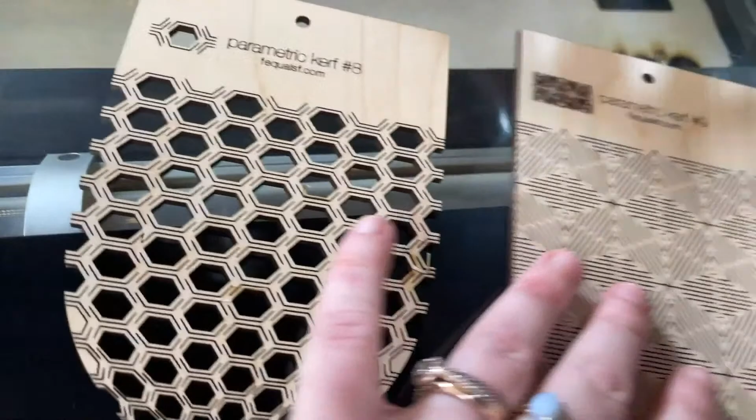Beautiful. If you want to take it a step further, I found some of these swatches online which I think are pretty cool. We didn't create these - I found them going down a rabbit hole on Pinterest. So these are the creators right here? I think so, yeah.

Whether they're the originals, I'm not really sure, but I think it's a cool demonstration of what you can do with this technique. This one's awesome because it gives you a three-dimensional kind of thing, so you can imagine using this on something that had to bend in 3D.

And this pattern's pretty big. If you shrunk this down by half, you'd in theory get about twice the amount of flexibility out of that too. That is so cool. And then this design here is very open, so we've got lots of holes which could show through a fabric or a backer, kind of like what Akika did. And then this one's very decorative but is utilizing closed holes.

Maybe I'm just scared to bend it - this doesn't seem as bendy as the other two. Exactly, and I thought that was interesting about these swatches. You'd think this would be really bendy because of all the open space, but it's more structured. Yet Akika's, which also has a lot of open space, is super flexible. That's all to do with the size of the holes in relation to how they're joined together, essentially.

There'll be some technical terms that I don't know, and I chose not to look them up so I didn't look like a fool on air. But basically, the wider that slot is that you cut, and the more of them that you cut, or the more material that you remove, the more flexible it can be.

What you'll often find with some of these, where you're just using a simple cut, is as they bend, the material essentially bunches together. Like the edges here and here and here, they're starting to touch. And as soon as they touch, they can't flex anymore - all they can do is break, which is why you need a quite dense pattern to get a lot of flexibility out of it. That makes sense.

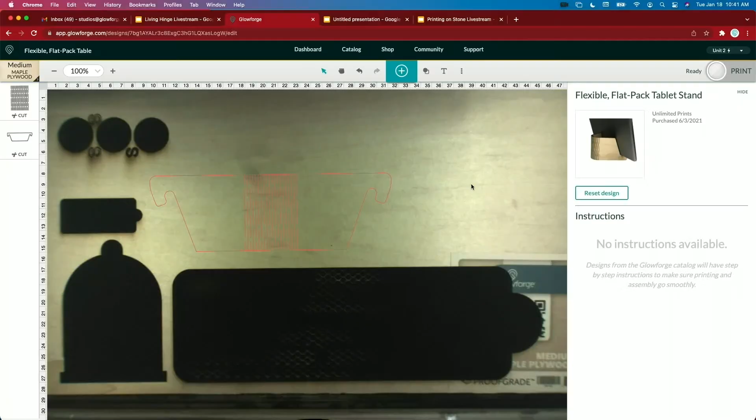Right now I have a Glowforge Pro attached to my computer, and this is the Glowforge Print App. This is all web-based, so it doesn't matter if you're on a Mac or a PC, or even want to use a tablet. If you can access a website, you can access the app.

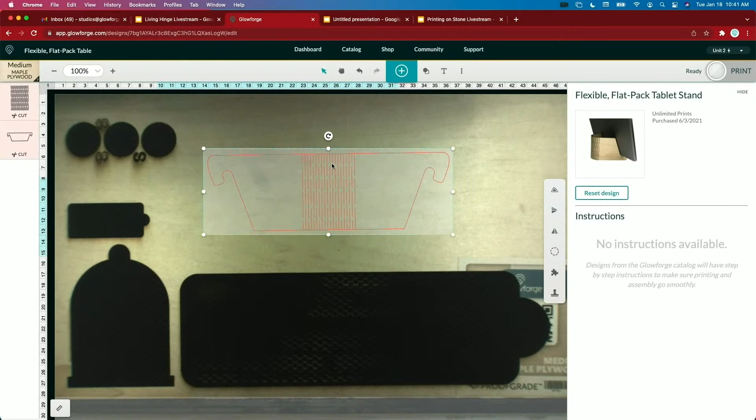What we're looking at right here is what we call live preview. It's my favorite feature, using a camera built into Glowforge to see what's inside. Here I've got my digital design, and if I move it over the black area, you can see those little notches that we're going to be cutting out to create the flexible portion of this design. I also have a piece of material already in the bed.

The beauty of live design—live preview, sorry, given that it's my favorite feature I should really know what it's called, right? I like you're just branding on the fly. Yeah, I'm just changing things up.

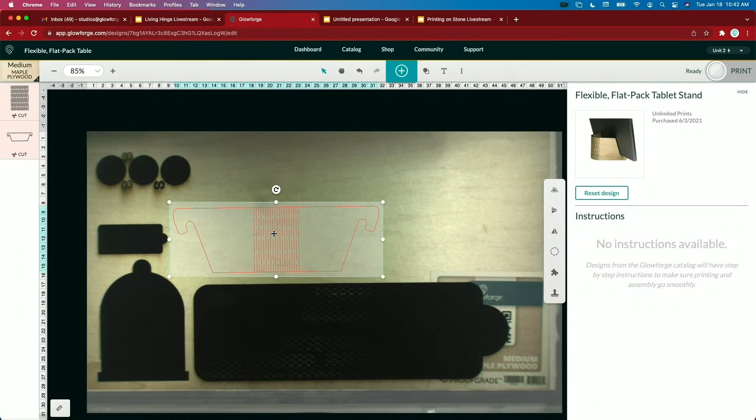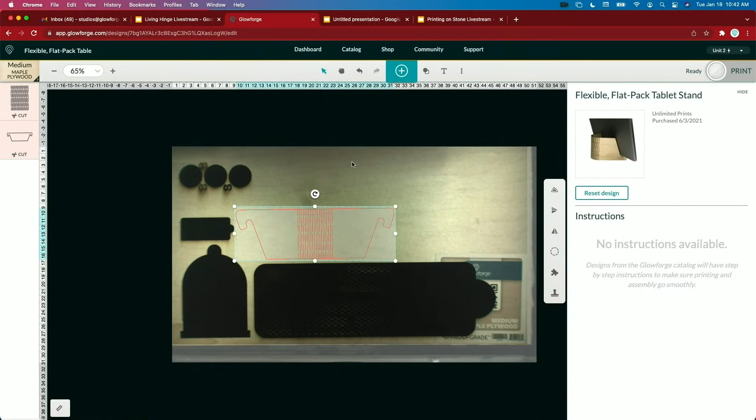The beauty of live preview is that I can take my digital design and put it exactly where I want it to print. On this piece of material, I've got some holes I've cut out for different prints in the past, and I can move this wherever I want it to go, so I can use this material really efficiently and effectively. So don't throw away your scraps—you can always make something with them.

The material I'm using is plywood, and that's really important—living hinges don't really work with many materials. You need that laminated structure to facilitate that bending. Hardwood, for example, has a grain running all the way through it, and that grain is going to interfere with the technique. It's almost like it could start a little crack.

Now for those of you feeling a little adventurous, maybe an advanced laser user, you can make hardwood bend. I'm not demonstrating this today, but if you wanted to try it, you need to figure out a setting that cuts about halfway through your material. Then on one side, cut a series of parallel lines, flip the material over, and cut that same series of parallel lines at 45 degrees. They basically intersect in the middle of the material and can facilitate a bend in hardwood. I've seen people do it with table saws and plywoods, but you can do it with a laser too. It's kind of advanced and doesn't always work, but feel free to try it.

I imagine too, if you were going to use hardwood with a living hinge technique, and you were just doing the bend once and gluing it into place—rather than something like a book or a purse that you bend all the time—that could work better. Yeah, definitely. And if you want to bend something and you're only seeing one side, like if you cut away most of the other side to facilitate that bend, that could work too. But at the end of the day, plywood is much cheaper than hardwood in the same physical size.

If you want to make something big, like buying a piece of hardwood that's that wide and that large, it would run you a pretty penny. So avoid that.

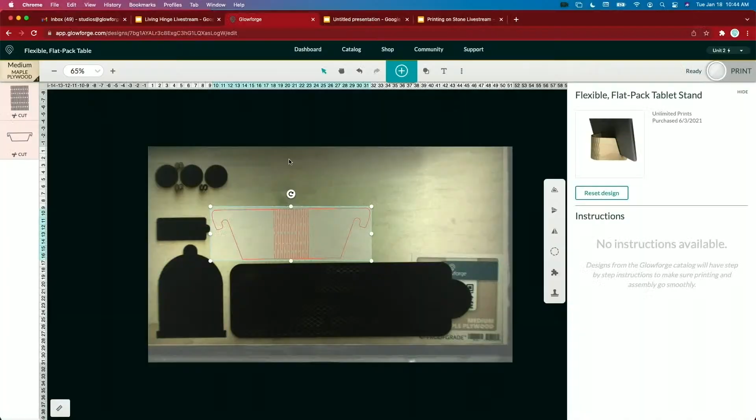But anyway, back to this demo. So here we have live preview. We've got our design, and I've dragged it where I want it to print.

Next step, we're going to choose our material. Right now it's already selected in the top left-hand corner. Let's say it wasn't - I can type in and find the material I want right here. What's important is it preloads the cut settings or printing settings for this material.

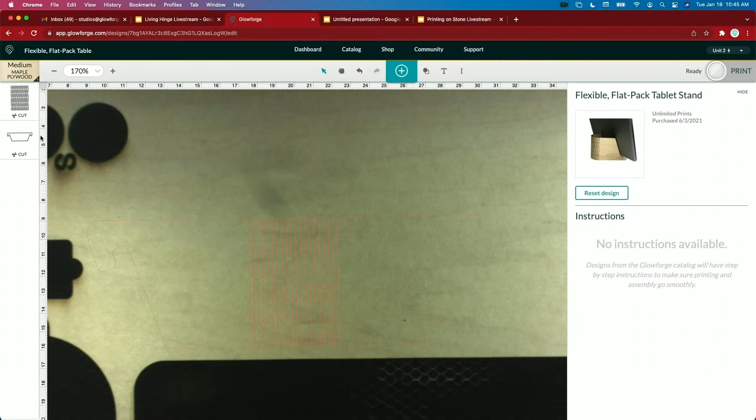Here I've got two different print steps, and as I hover over - let me zoom in so you can all see - it highlights the different part of the print relevant to that particular step. By a step, I mean a combination of speed and power. This is going to allow us to cut through that material.

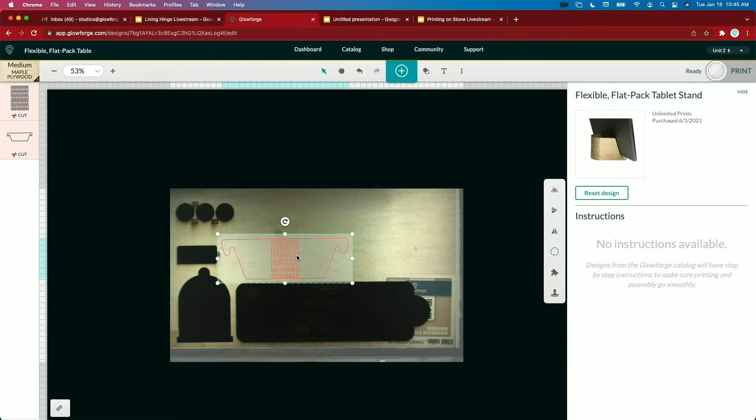But really, that's it, that's all we have to do. It's that simple. Now I can copy and paste this if we want to do multiples. I can delete them, we can scale, we can rotate - tons of control. If you can use a piece of word processing software, you can be successful with this. It's really, really straightforward.

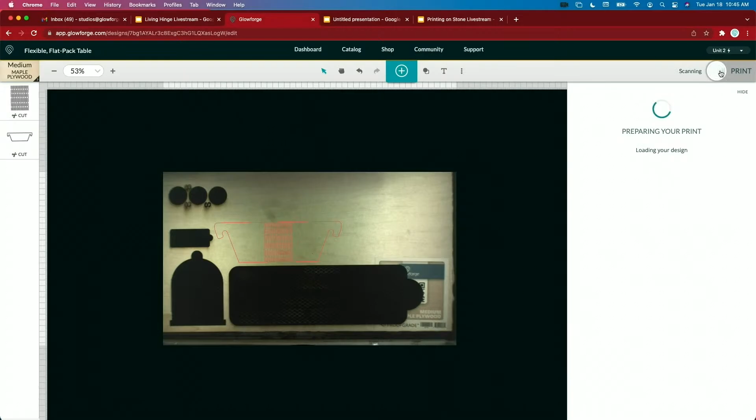And then all I'm going to do next is hit print. What that's going to do is take that design, turn it into a bunch of code and math, and send it up to our cloud for processing. A bunch of math - you know, it's early, who wants to do math at this time of the day?

It'll send it back down to the Glowforge, where we have a single button. When that button flashes, you know your print is ready to go. All we have to do is hit it and we can kick things right off.

All right, now here's our material - you can see we're using something we used for a previous print. That's the beauty of that camera. I'm going to use this sheet of material until it's all gone. This is glowing. I'm going to go ahead and press it. Beautiful.

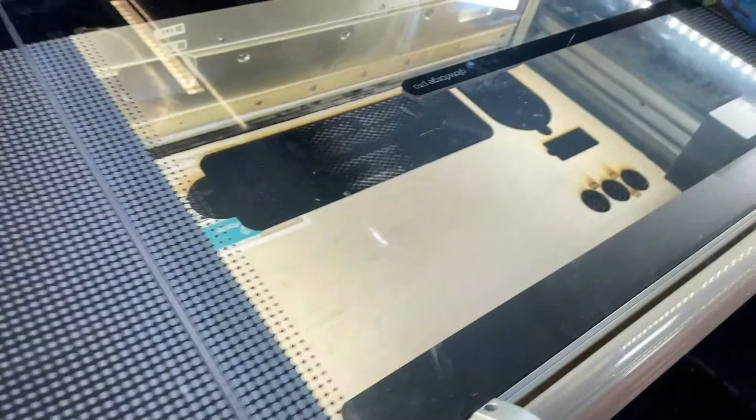Now, I know there's a bit of controversy sometimes about whether Glowforge should be Wi-Fi connected or not, but one of the real benefits that might not be obvious to some of you is the way we control and manage the software. Every time you open your computer or browser and log in, you're using the latest and greatest version of that software. There's nothing to download, nothing to install.

It just works. I like to say to people that the day your Glowforge arrives, it's the worst it's ever going to be, because incrementally over time - every month, every quarter - there are significant updates released with different features and capabilities. It might be things like material settings; we just added cardboard, for example, a little while back. Things like that are really, really helpful to you as an end user of the Glowforge.

So try not to feel too negatively about it being a Wi-Fi connected product. I can tell you there's a ton of benefits to it.

And the great thing is it sends the whole design up to the cloud and processes it before the print starts. So once your print has started, even if you for some reason lost connection during the print, it's able to finish. It's already up there in the cloud, or rather down in the Glowforge locally at that point. Absolutely.

Yeah, definitely. Which is hopefully reassuring.

When you're setting up your machine, there's only two things that go in or out: there's the power cable, which is just a standard 110-volt connection, and then there's the silver vent hose, which comes out the back and can either go out of your window or into the compact filter. I can show you that real quick.

So this is for venting, as Nick was just saying. This comes with it. It's just like an aluminum dryer hose, like for AC or a dryer or what have you. So what I do is I just throw the other end of this out the window.

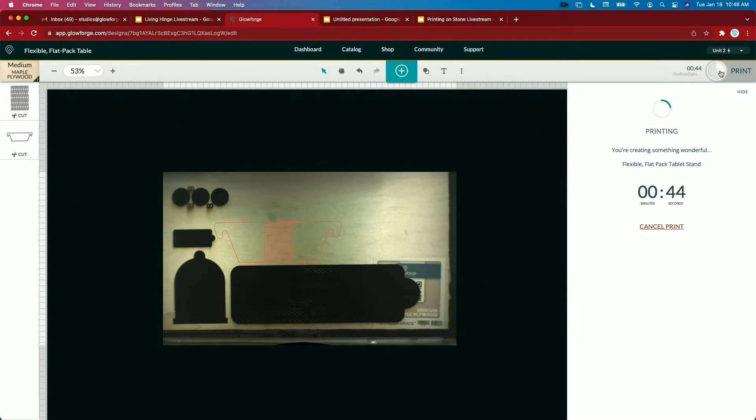All right, this is telling me we only have 44 seconds left. It's a quick print, that went really quick. Do you want to get the camera on there and show people just how quickly this can print? Bear in mind, we're cutting through 1/8-inch thick solid maple plywood right now, and this is real time, real speed. So cutting is a very quick operation.

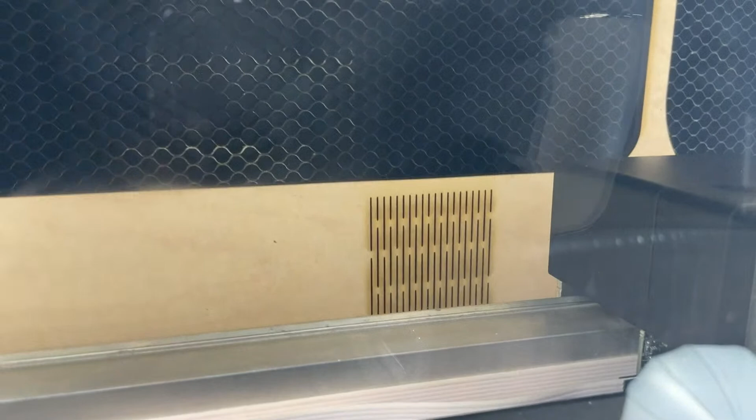Now, the print itself takes a little while because we've got such a high density of cuts where that living hinge component is. But if you think about this, let's say you were printing these to give away, or maybe selling them, everything in the Glowforge shop, or at least the majority of it, can be sold once you've printed it. So if you want to make a few dollars, bear that in mind.

But you can just leave this printing. You could arrange 8 or 10 of these on one sheet, send it to print, and while that's happening, you could be working on your next design, emailing your customers, whatever it might be. So it's really hands-off once the print has been sent. And that's it. How cool.

This is such a clever little design because it's immediately usable too, right? Yeah, it's so simple. And I've thought about printing these before and kind of containing it in the waste, almost like a postcard, and you could write something on it, ship it to someone, they pop it out, and they can use it, all that kind of stuff.

Clever. That's a good way to ship fragile things if you're a seller as well. Yeah, exactly, flat shipping. That's a really good idea, in fact.

And so here's our print. Here's our scrap. Like I said, don't throw this away, let's keep this for next time. So here it is, and then I don't know if we have a tablet, but if we had a tablet, it would sit right here.

You'll notice this, let's look at it up close. It has a little bit of charring around the print, around the edge. You can even see it's kind of sticky looking. I think it's a couple things: the natural resins from the wood combining with perhaps a little bit of the adhesive in the paper, because we actually... can I do this with one hand and my left hand?

I can help if you want. Yeah, so we have masking on top of here. So look at that, that's this maple underneath. And see, it's nice and clean.